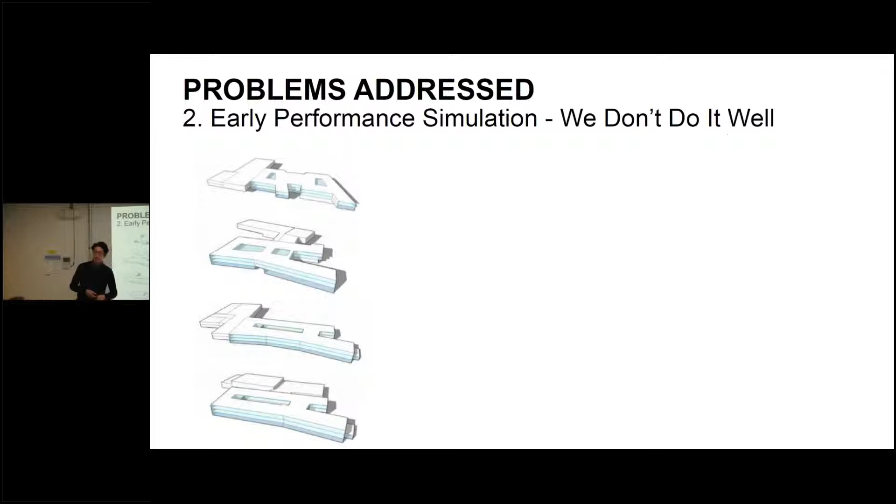So here we go. We have all of our different building masses. And with Sefaira, you can very quickly get an energy use intensity. You can get kind of a split of your primary load breakdown. And what's really nice is sort of this dashboard for what's over or underlit from a daylighting standpoint. So they're running full annual analyses for daylight and giving you sort of a breakdown of what that looks like. But I mean, this is sort of what we're left with, right? 29, 31, 33, 31.

It barely moves, right? And all of our takeaways from this is that they're all cooling dominated, and the daylighting amount sort of shifts around a little bit, but this is all not very actionable, right? This doesn't give us a lot of keen insight into which one of these we should actually choose. The differences aren't big enough, right, for us to really gain any insight into this. The questions were too broad, right? We're just trying to understand what's the energy differences between these, and that's not leading us to anything that is empowering, right?

A lot of times something like this would actually be disempowering to architects, right? Because it's saying that the form and the massing isn't really driving energy according to the way that this is being presented. But the real kind of questions and nuance are much more detailed than that. So the takeaway from this is that our questioning for early performance simulation really needs to be targeted to be effective. And that's going to be a theme that you hear throughout this whole presentation. The other thing would be that showing EUIs like this is almost attempting to be predictive modeling.

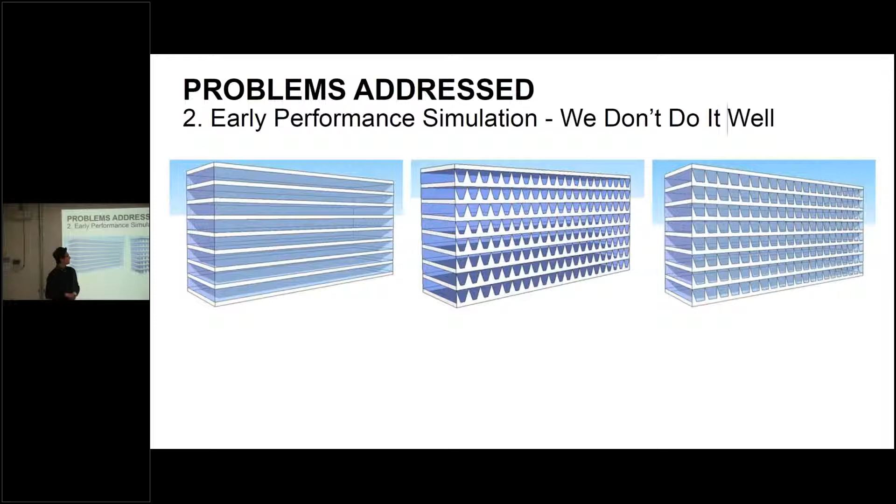And here's another example that kind of always drives me crazy. Another Sefaira example, not picking on them, but they have some good case studies on their website. So in this case, you have an architect looking at multiple different types of facades, sort of a typical approach. In this case, it's window to wall ratio with a different type of detail that kind of projects outward. And what you generally start to see from this are a bunch of bar charts that talk about the trade-off between, cooling energy is blue, solar load is red, daylight is orange, and these are baseline and two different glazing types.

So once again, this isn't really being driven by any particular question around HVAC system selection, target loads, comfort, but it's really just let's see what the energy differences are. And the result is something that, once again, is not significant enough to really drive decision making, and it's generally obvious just by looking at the project. And it takes a lot of training and time to be able to set up these simulations. So this actually is not doing us any favors, right? This level of study and this level of analysis.

So how do we get beyond this is one of the questions, both in terms of setting up early conceptual simulations that drive design, and then also engaging designers and engineers and early stakeholders around how we present that data and form a conversation around it.

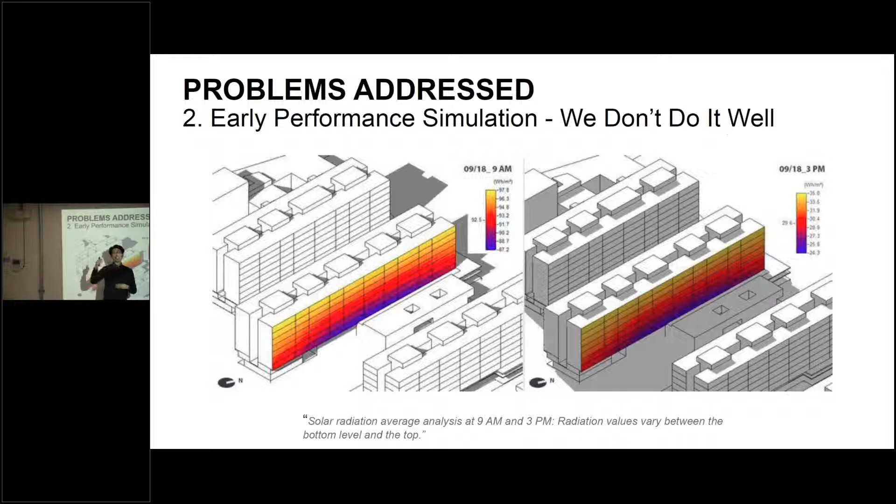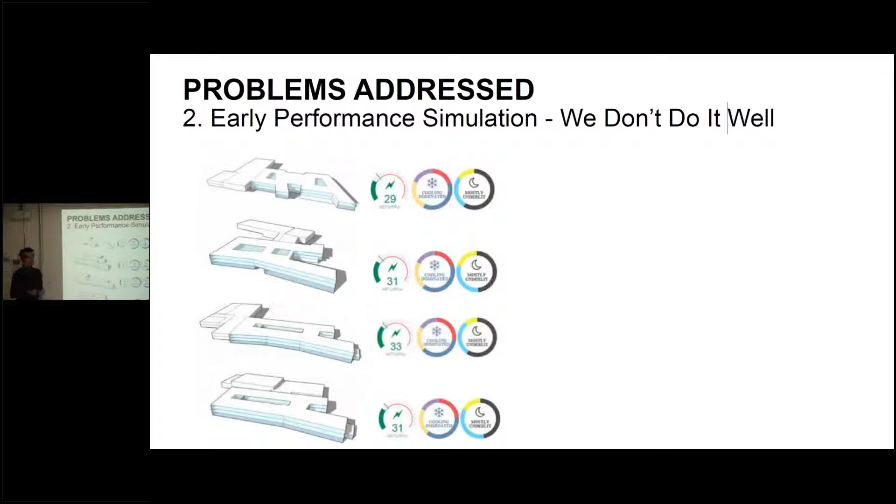So problem number 2, there aren't a lot of good examples out there of how early simulation really leads to a better building in the end, right? There's ultimately a disconnect between even this type of modeling and the compliance model at the end when we do a full-blown rigorous analysis. And what's the relationship between those two? It's not a very direct line in that respect. Okay, so problem number 3 that we're looking to solve is this communication gap between simulators and designers, right?

This is one of my charts, so I get to pick on myself a little bit too. Look at all the bar charts, right? Who is gonna look at this and really start to engage with it when I have 2 seconds with a design principal trying to talk about their facade design, right? This is not doing me any services, although there's some good parts about this.

Fundamentally, it's too dense, it's too complicated. There's nothing about geometry or impact implicit within the graphic. So you show this to someone and their brain just sort of turns off, right? I'm trying to represent a multitude of different variables that are geometrically based in a table of all things, right? It's color coded, yes, but for the most part, this is really hard to track exactly what we're talking about.

We have a threshold identified and some different cases that actually work, but still this is fundamentally just a dressed up bar chart, right? And how do we get beyond this as well? Because we have things like this, we have full-blown energy modeling reports, which also aren't necessarily giving us the insights that we need, especially early in design, right? We shouldn't even really be getting full-blown energy modeling reports for that.

And then also, I just got an example sent to me earlier today. We're looking at Okalux as a product, which is an integrated louver system within an insulated pane. And they can do lots of really good optimization analysis to say that we can block direct sun anytime you need it. So just tell us where you want direct sun and we'll give you an egg crate design that fits in a glass that will block it. And I was like, this is great.

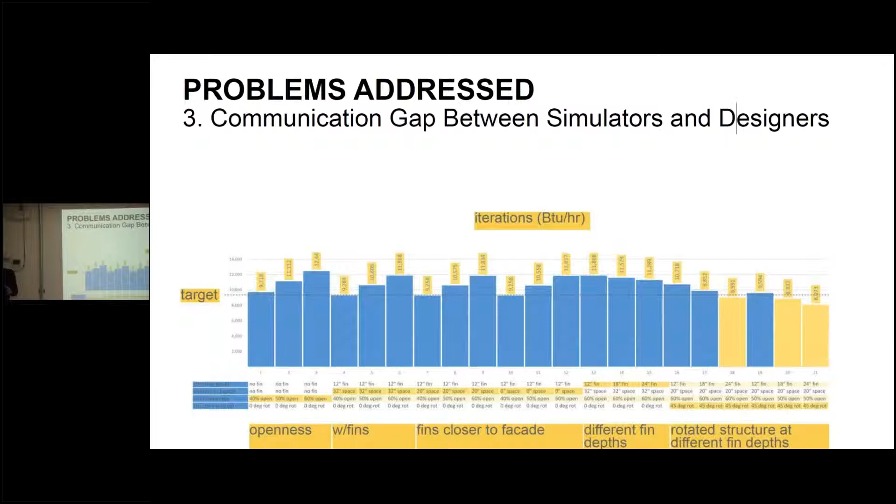So problem number 4 that we're trying to solve with Project StaSIO is the fact that it's hard to learn from each other. BSUG is a great example of a community that we've built in Boise, people coming together and trying to share technical solutions and simulation processes and workflows. That doesn't always exist everywhere, right? And there's a lot of really good resources around how to do simulation.

This is Unmet Hours. This is a fantastic forum where they have all of the different energy simulation programs on there. Experts peruse the forums, and you can ask questions about technical problems that you're experiencing. There's not something that exists like this for how effective was the study? What did you learn from the study? How did this impact design? That's what we need, right? Or that's what we needed.

And Sefaira has a really good case study page. A lot of the software providers do. But like I said, you go through those Sefaira examples, and a lot of those studies you are just left wanting at the end, right? They're not really good examples of how early performance simulation helped drive design and lead to a better product.

And the other thing too is, at ZGF, we're a big enough firm that there are multiple people doing simulation. We have our own internal user groups and a lot of different experts. If you're in a firm of about 30 and you're the only one doing modeling, it can be really hard to share information with folks across firms because those channels aren't always set up. A lot of times people hold their industry secrets and their processes pretty close to their chest. So there's no online community around that.

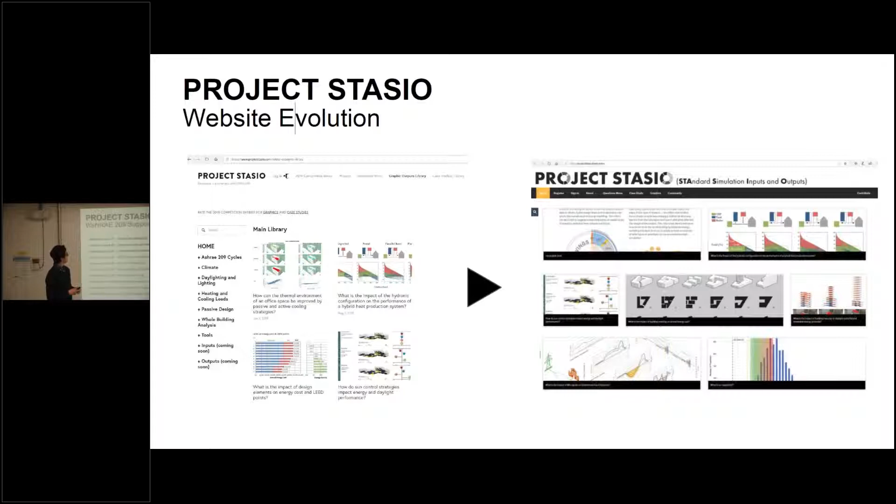So the early thrust of the committee, and actually I guess it was the entire origin story, is that we were tasked with trying to figure out a way to support the ASHRAE 209 standard. Somebody familiar with ASHRAE 209? I know Tim probably is, a couple folks. So this is relatively new, but it's ASHRAE's version of trying to have a standardized process for integrating early energy simulation for design, right? So this is a framework: if you want to do early simulation modeling, follow these steps, and it's a good process.

So they talk about energy benchmarking, climate analysis, and then there's all these modeling cycles, and you have to do a certain amount of these at a certain time in the project to comply with the particular standard, depending upon what you learned in your early investigative studies. So for us, we were focusing on the top three: simple box modeling, conceptual design modeling, load reduction modeling, and trying to say, okay, well, there's this standard.

They talk about doing this, but there's not a lot of good examples out there for what is simple box modeling and what types of questions can that answer, and give us some examples. So if we're trying to evaluate whether we're going to use this standard, we want to know what it can do, right?

We want to have some basic understanding of the process and what problems it can solve. So, we needed to make sure in whatever we did that we were providing resources around that and examples for ASHRAE 209. And then, we are slowly trying to fill in all of these other different cycles and figure out examples and case studies around those as well.

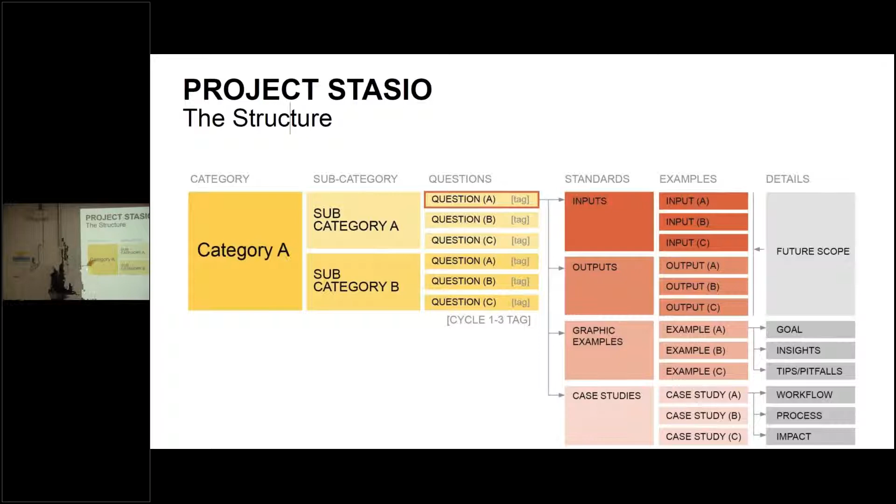What we're doing first is, based upon that question, we're really interested in trying to gather graphic examples and case studies, so that once we get an example, we can talk about what the goals were, insights, and tips and pitfalls for doing that kind of simulation. And part of that was starting now to categorize and catalog what were the key inputs and outputs for that. So our goal was to take all of the things you can do with simulation, populate it, and then start to aggregate examples around that.

And based upon that structure, there's 2 fundamental parts of the website. The first part is this questions menu, which actually took this from a Better Bricks document that came out, I think, in 2012 when I was here at the lab. And it was great because it was their own guide for integrating early simulation into the design process, and they had it by phase, and they had bullet questions at the end, which were: think about these questions when you're doing design during this phase.

And I was like, how great is that to have a menu of questions per phase that you can start to take to your project manager and say, hey, I think we should do this. So connecting it back to my time at the lab, right? We created that on steroids for this particular project. We went through everything from those daylight categories to whole building analyses and tried to list out all the things that we had studied as a group, as, hey, this is something that you can look at, right?

So, how much more energy will my building use if occupant density or use schedules vary from initial assumptions, right? Very key question when you're talking about net zero design or load matching with PV. All the way to, what are my energy end uses ranked from highest to lowest, which is a great question that you can answer with whole building simulation. So these link to the examples and case studies, right? You can click on this and it will take you to all of the graphic examples of someone trying to answer that question so you can learn from it.

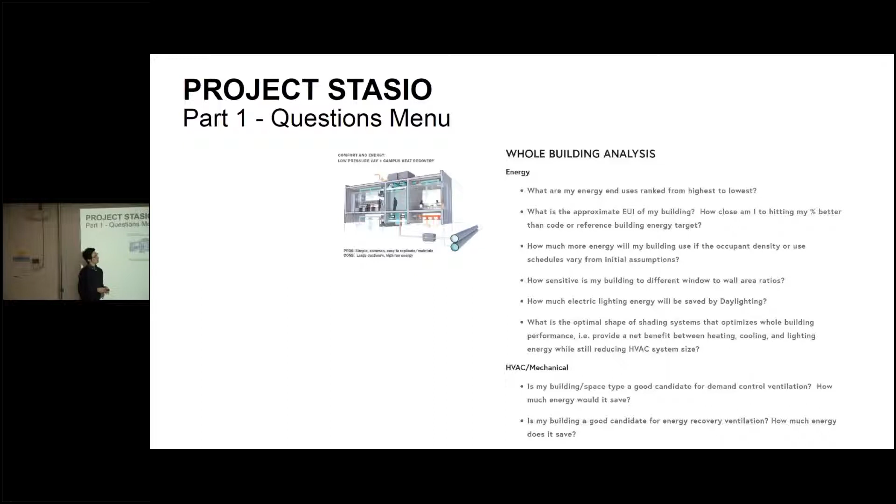So the second part of the website is the graphics library. There's also a case studies library. And this is where we sort of house all of the submissions that we've gotten from the internet, from our engagement with the IBPSA users, AIA, all of our kind of promotion, like with what I'm doing here. And the key thing here is that these are available, and then we have some type of filtering mechanism, like an Amazon shopping list, where you can say, I'm doing ASHRAE 209, I really need to understand load modeling, so I can click this and this will automatically shuffle and show you all of the ASHRAE 209 cycle 3 load reduction modeling examples, so you can learn, get inspired, and start to understand that.

So we have it broken down by cycle, by the different categories, also by tools. So if you're using Honeybee for energy analysis or want to know what people have done that for, you can filter for that and then it'll reshuffle. Inputs and outputs. So let's say you want to look at annual sunlight exposure as a metric. What are the different ways that you can deal with that? You'll be able to filter for that and everything will come up that have tagged ASE as one of the outputs for their submissions. So that's sort of the guts of how we intended the website to work.

We're able to get pretty far there with sort of the Squarespace site, but the functionality is much better on the new site in terms of its navigation and like the checkboxes you can click on and off to kind of look at different filters.

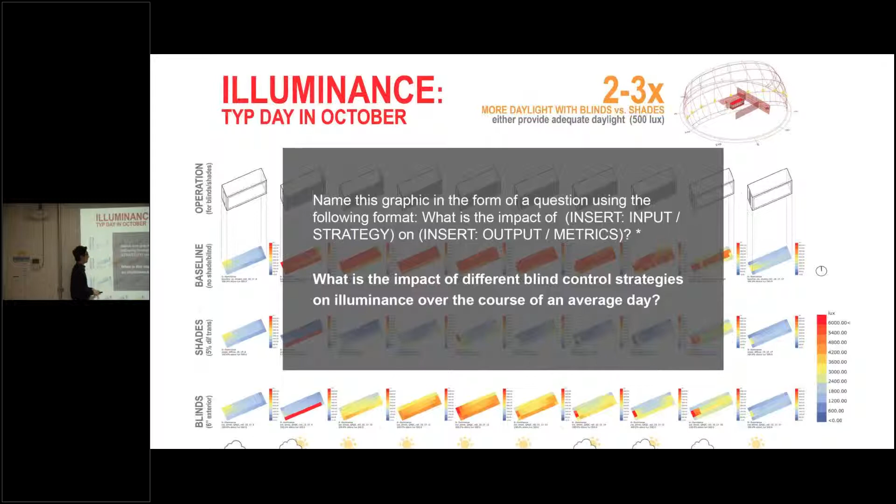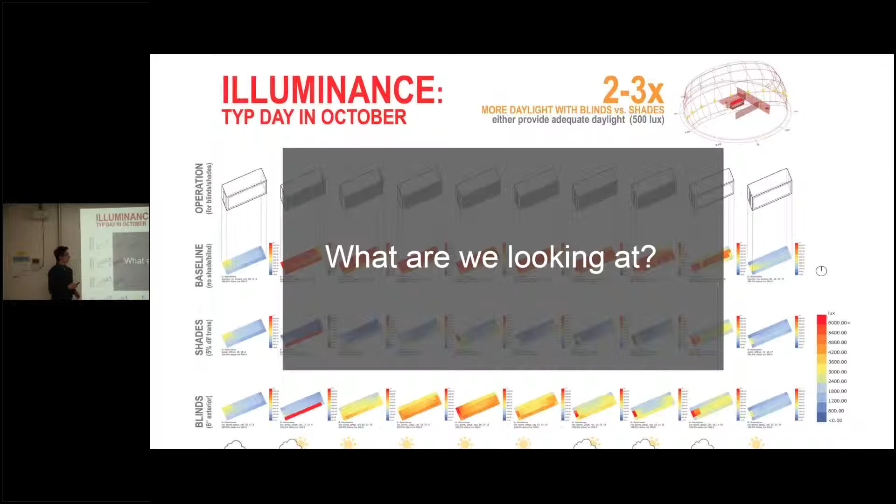So the next question is, what are we looking at? I think they're like 250 word maximums in each one of the different sections. I'm just going to summarize those for this graphic. But in this case, since this is a fairly complicated graphic, that allows us to say, well, this is looking at two different blind control strategies. One are Mecho shades, and the other are blind slats, both automated. They're compared to a baseline condition without any solar control. And it's shown for a typical day in October.

So there's a key for what the sky condition is on the bottom. Everything's in lux, so it's illuminance, single point in time, hourly illuminance. There's a key up on top that shows when the blinds are being triggered based upon those different sky conditions. And then we show in the corner some of the key takeaways with the actual geometry of the space and its particular context. So just the bare basics of what exactly we are looking at.

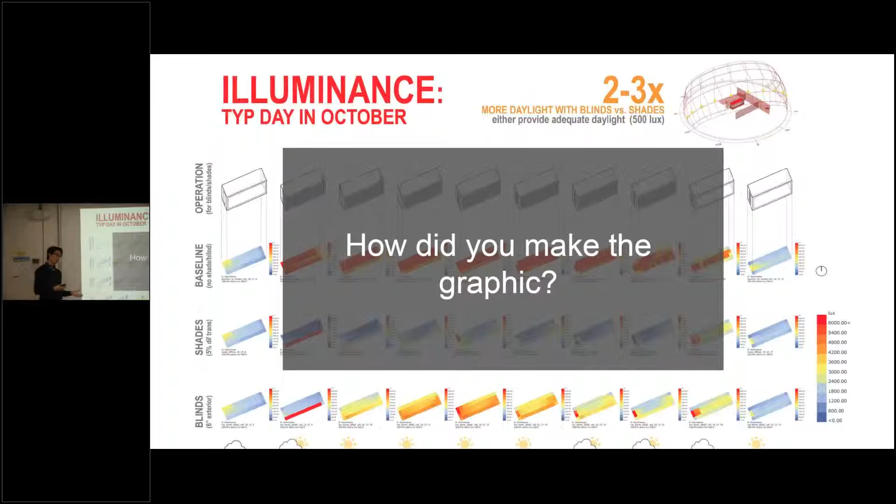So the next question is, how did you make the graphic? And I think that's a really key question too, because there are so many different ways and workflows to do it that it's really interesting to see what people are submitting and figure out how much of it was post-processed, how much was done within the program, and so on. And the key thing about this graphic is, thinking back to the old days, you can imagine doing this in Ecotect and Radiance and having 30 different image thumbnails that you put into an InDesign file. Just makes your head explode a little bit.

But since the analysis in this case was done in Grasshopper, a lot of the graphic manipulation can also be done in Grasshopper, which is a plugin for Rhino. It's a parametric visual programming interface. And what's nice is that since we're running each one of these for a certain amount of hours throughout the day, all these files get automatically stored into a folder, and then the graphic component of the tool allows you to harvest the image files out of that folder and translate them according to a script so these all get automatically placed in Rhino. And then you just render that screenshot and plug it into InDesign.

So all of this is one image that gets automated and comes out of Rhino. It allowed us to do so many different iterations so much quicker because of the graphic workflow of how to produce a complicated matrix of time series data. So that was one way, and then everything else is post-processed. All of these labels are in InDesign. These labels come directly out of the program, so those were automated, but there's always some level of post-processing that goes on.

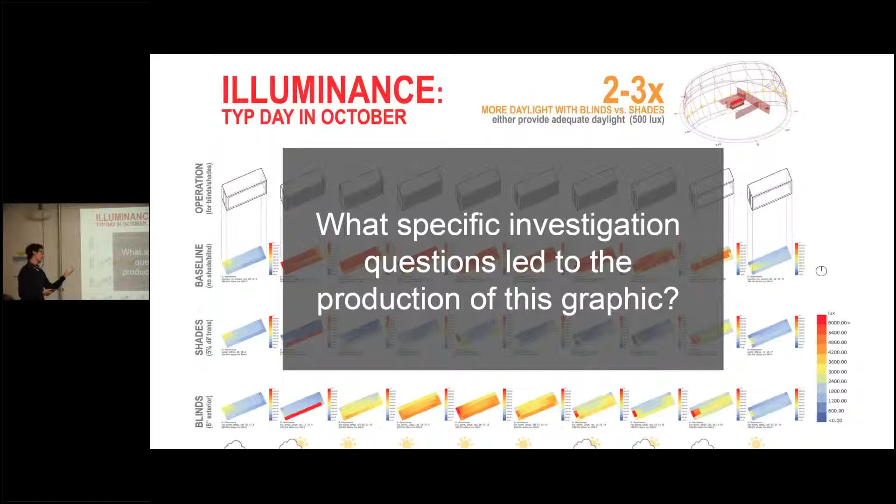So then the next question is, what specific investigation questions led to the production of this graphic? Going back to the title, we're really interested in the difference between these two different blind conditions. That was primarily driving the entire thrust of the study. There were some implicit workflow questions like, how do we simulate this properly between MechoShades and blinds, which have to be angle optimized. So we did that all within the script as well. So there were some more complicated simulation questions that we were investigating as well.

But fundamentally, blinds versus shades, and specifically how much of a difference, because we know that blinds are going to be better because they redirect light, but we want to know how much, because we also know that blinds are going to be more expensive. So we had to advocate to the client the value of them through these types of studies and the quantification of that particular difference. I didn't mention it before, but this is a makerspace, part of a lab building on a campus in California. So sort of a small jewel box that they wanted to be a feature of the campus.

They wanted it to be all glass, but we also know that for a makerspace, the comfort requirements and the visual acuity requirements are high, so those were automatically in conflict, which is why we looked at automated shading. And that's getting to this question: how did this graphic fit into the larger design investigation, and what did you learn from producing this graphic?

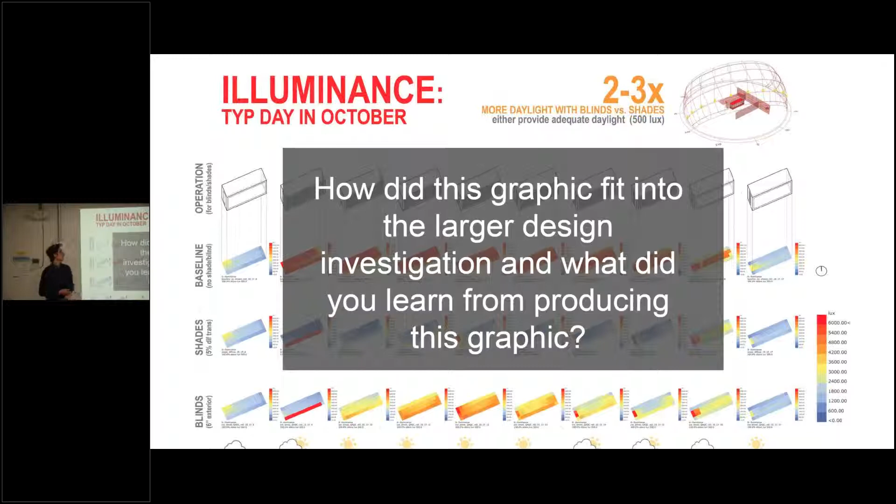So, because we had this fundamental conflict between wanting a glass box and needing acute visual control, we knew the sun's going to be on this facade so often, the blinds are going to be drawn a lot, right? That's what this is starting to tell us. So we want to make sure that when the blinds are drawn in that condition, it doesn't kill the quality of the space. Because if it's a MechoShade, it's just a reduction of daylight coming in, versus if it's blinds, it's redirecting that and actually having a better impact on the space.

So the high level takeaway is that depending upon what hour you're looking at, between the baseline condition, MechoShades, and the blinds, you can just tell from a color standpoint that there's a big difference here. You could tell that it's roughly 2 to 3 times more daylight in the space with these automated blinds on average. So that was the highest level takeaway that we wanted to look at.

But that also goes to the next question: what is successful about this graphic in the way that it communicates information? And what we wrote in the form is that there's a high level takeaway. You don't have to get into all this detail, right? You could just look here and that's your highest level takeaway. But the further you look into this, the more detail you can extract out of it, including spatial data.

So this is a little misleading. There's a section down below that doesn't have any blind control. The blinds stop, I think, 11 feet above the ground, and there's an overhang. The simulations all take this into account, but I didn't get it into the key graphic. But what's interesting is that you can see, even with the blind condition, you get a little bit of a hot spot still in the evening, right? So even with these automated blinds with the better daylight, you still have a hot spot from a glare perspective that needs to impact programming.

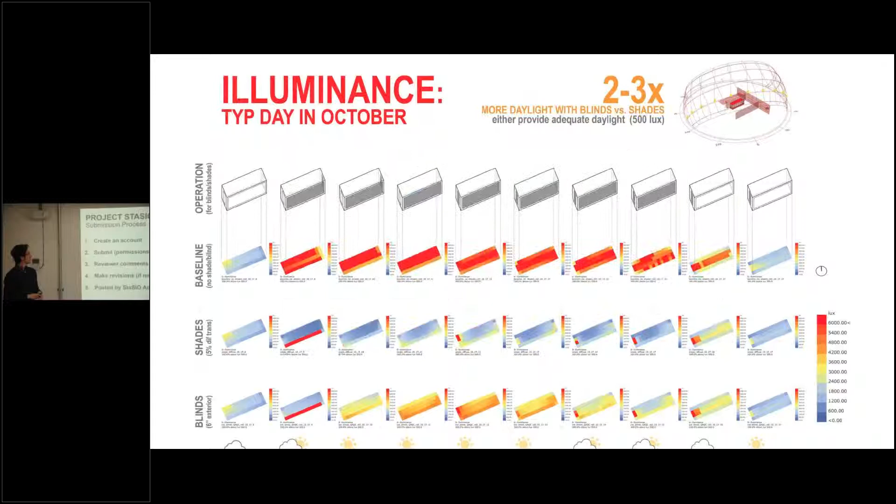So that was five fairly simple questions, and the level of detail of the answer can vary, and you'll see that across the website. But that's an example of the level of information we're asking, really trying to tie it back to the investigation process and the design process. Okay, so as I mentioned, the submission process is fairly straightforward with the new website. You've got to create an account, and you submit.

We really spent a lot of time making the online review process a lot easier. With kind of iteration 1, we had like a Google spreadsheet that we would email you, and you'd have to modify it, and then you would email it back, and then we would go back and forth that way. It was just ridiculous, right?

So now everything is more like a journal paper kind of format, to where everything is handled within the website, and you can log in and see my comments on your submission, saying like, oh, I think this legend needs to be a little bit bigger. Oh, I think this could be a little bit clearer. Hey, I modified this typo, is that okay?

And so the back and forth is a lot more seamless now, which we're really excited about, especially because we get 50, 100 submissions for our next competition. It needs to be streamlined. So after we do that, then we post it and it shows up on the website.

What was really interesting is that in 2018, our competition recap, we started this, we got about 20 different submissions just from us engaging folks. Then we were like, hey, we should probably do a competition and really use that as a catalyst for getting these particular submissions. So we launched a competition. Winners were announced at the SimBuild conference in Chicago last year in the fall. Launched the competition in the summer, results are in the fall.

And it was great because we got 40 different graphics. We got 12 different case studies. Recognize this one came from the lab. And we set up this whole competition structure, which I think has been really great for the website to actually get those submissions. And we set them up sort of like the AIA system, where we couldn't really rank them because we're getting very different types of graphics and simulations. So we really looked at honor awards and honorable mentions, right?

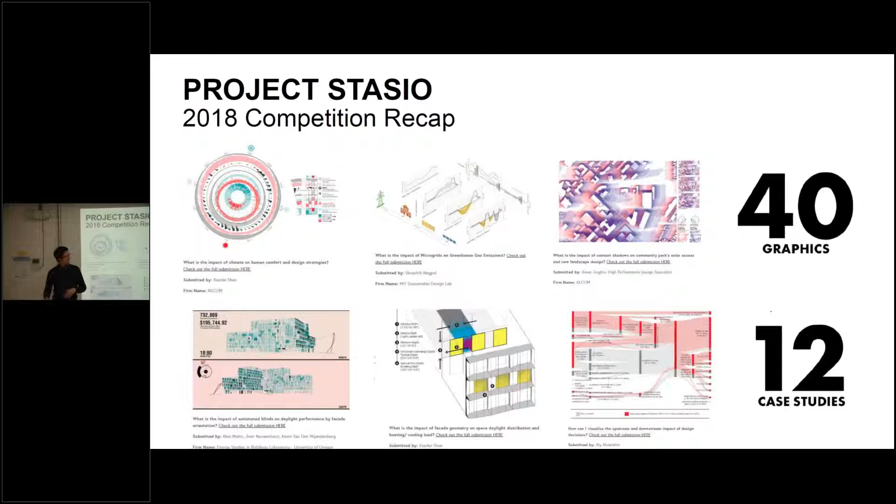So these are the 3 graphics that got honor awards, and I'll talk a little bit about those next. These are the 2 case studies that got honor awards, and this actually won the People's Choice Award. Sankey diagrams, who doesn't love Sankey diagrams, right? So it was great because it did its job. It was so successful that we're doing it again. We've launched our 2nd competition. All this material just went out earlier this week.

So our submission deadline, if folks are interested, is 7/15, and then similarly, winners will be announced at the next SimBuild. If you get an honor award, I believe you get invited out to present during one of those sessions. We did it last year, it was a lot of fun. We've got a page for details of what that framework for judging is. So if you do submit, there'll be a checkbox at the very beginning that says, do you want this to be part of the competition? Yes, no, maybe. And then you'll move forward in doing the actual form filling.

So, okay, that was a lot of the details. I do want to talk about what we learned from some of the particular submissions from 2018. Let me just do a quick time check.

So this was one of the graphics honorable mentions, and what was really great about this is it's a pretty simple analysis to do, right? This is a butterfly shadow diagram. This is for September 21st, and they took every shadow at every hour, overlaid them on top of each other, and you get this heat map of where light is and where dark is from a direct sun standpoint. So they took this to the next level in Grasshopper, and you can read about how they did that on the website, and did a 2-tone color where the AM shadows are red and the PM shadows are purple, blue on the screen.

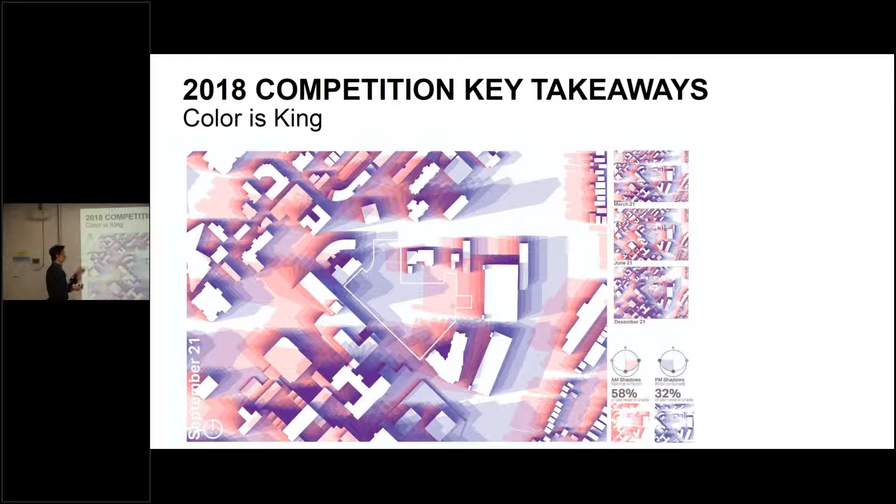And that was really great because they're designing for this community park. You can see the footprint. And because of the programming, the park had a very specific occupation during the morning and a very specific occupation in the afternoon. So they really wanted to understand the difference in shadow patterns between those 2 time frames. So this allows you to do that at a glance. It also provided key insights into plant programming for the landscape in terms of having a low, medium, high exposure to sun.

So based upon this condition and also these other solstice and equinox conditions, they could actually give that information to the landscape designer to help their plant palette selection. So, pretty simple, but there were a lot of insights that came out of that.

One of my tips always with graphics is that there needs to be a spatial component, right? So you understand the impact of geometry on performance, whatever that is, and then a quantified component so you have a benchmark to study if you're doing variations and iterations. So they just roll up in terms of percentage of the site that never gets shade in the AM versus the PM as another metric to evaluate things by.

So this one was great. And I remember reading in their submissions that when they were asked what was the most successful thing about the graphic, they said that people actually wanted to talk about it. So they attribute that to it being visually interesting. When they took this to their charrettes with the clients and other stakeholders, they said it generated a lot of discussion, which is a fantastic outcome, all because of how visually interesting it is.

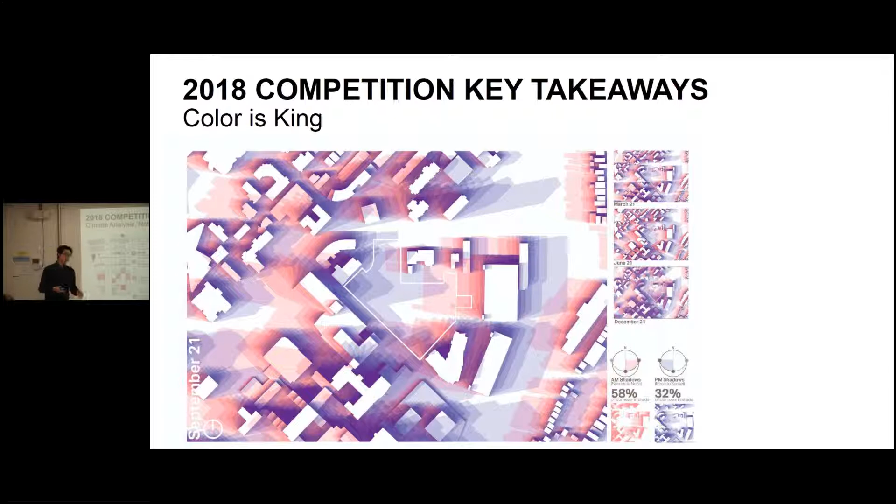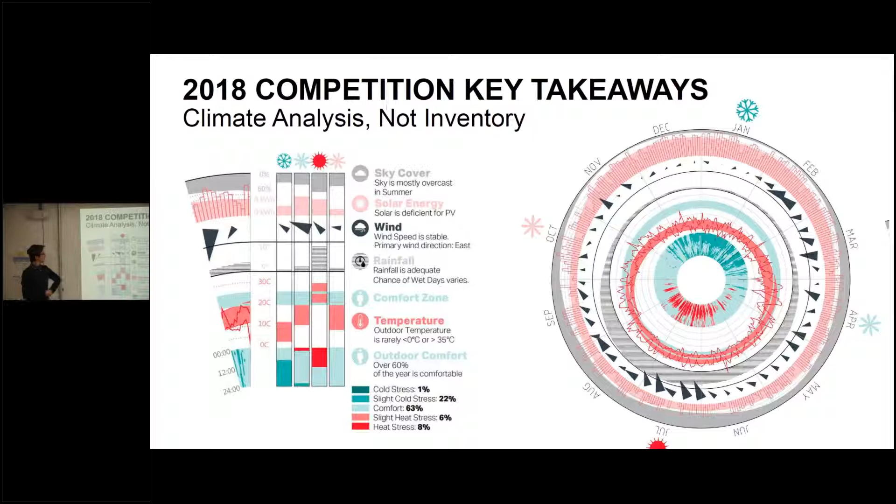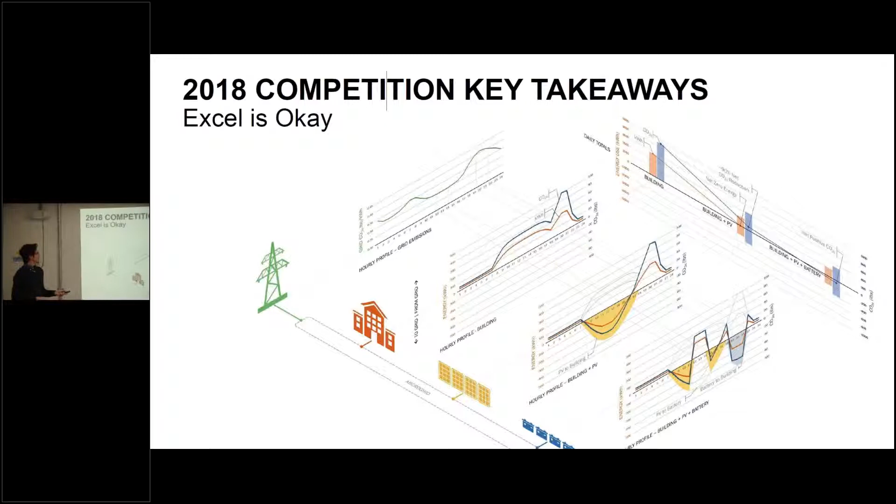Okay, so I think we're doing pretty good on time.

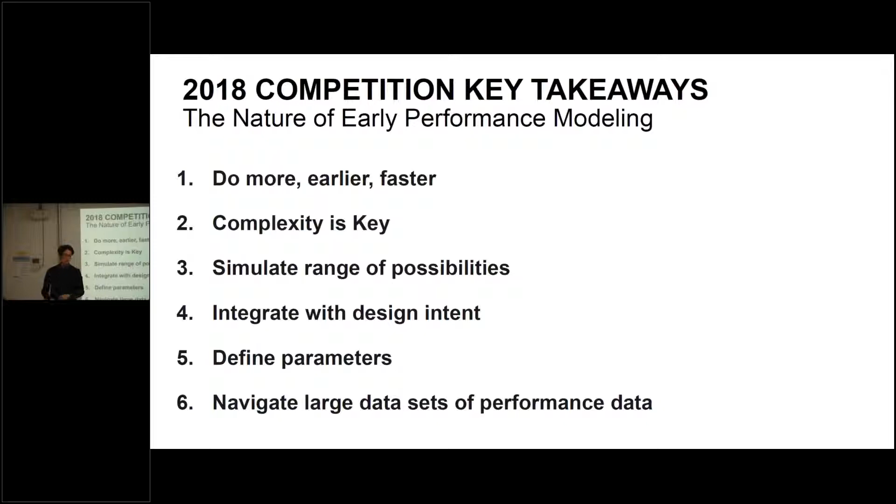So when we're doing that, the key becomes now we must navigate these large data sets in ways that are insightful. So I've got an example of that, an interactive way to do that, and a static way to do that, and hopefully I'll be able to get through that here in our last couple minutes.

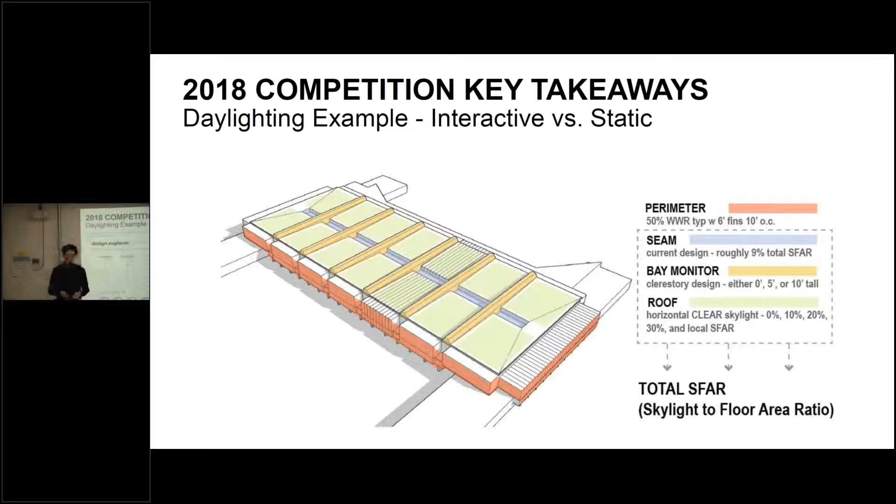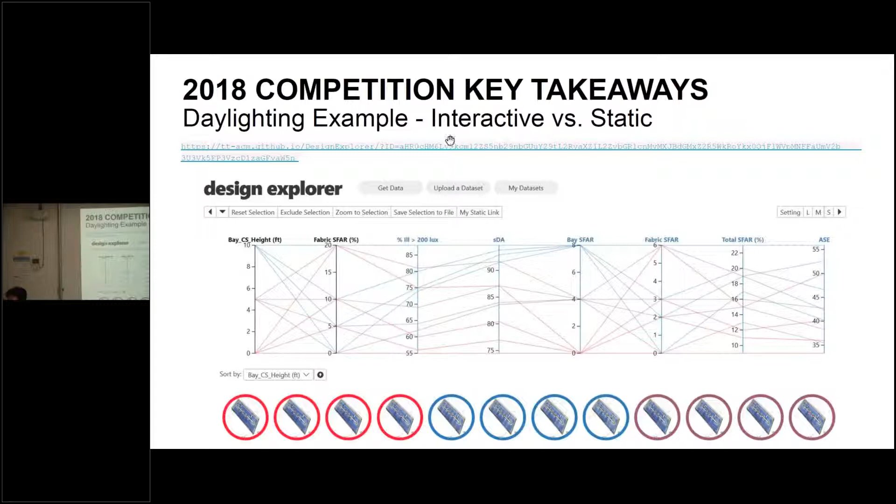So there's a new tool out there called Design Explorer, which is free, online, and it's basically a CSV viewer that uses images and three-dimensional files to give you additional information. So I would recommend checking this out if you have time, but I'll give you a quick preview of how it works.

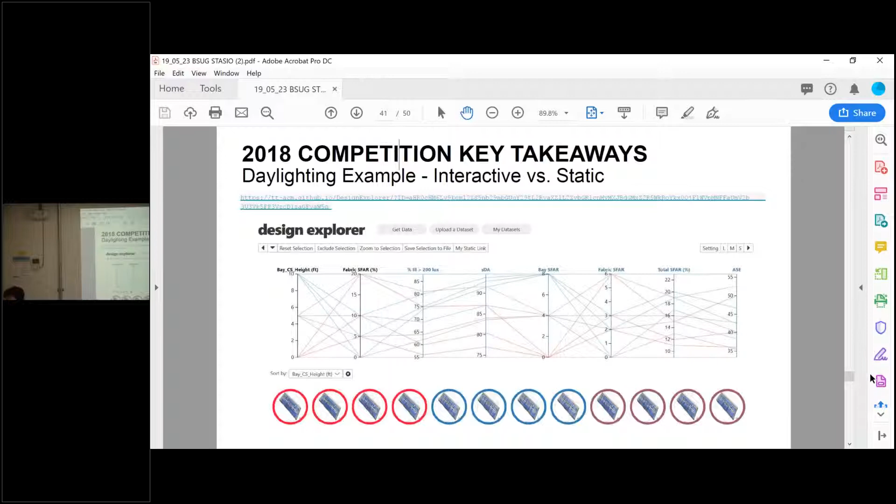So, all right, stand by. Okay, so parallel coordinate plot. Has anybody seen one of these before? Tim, I know you have a couple of folks.

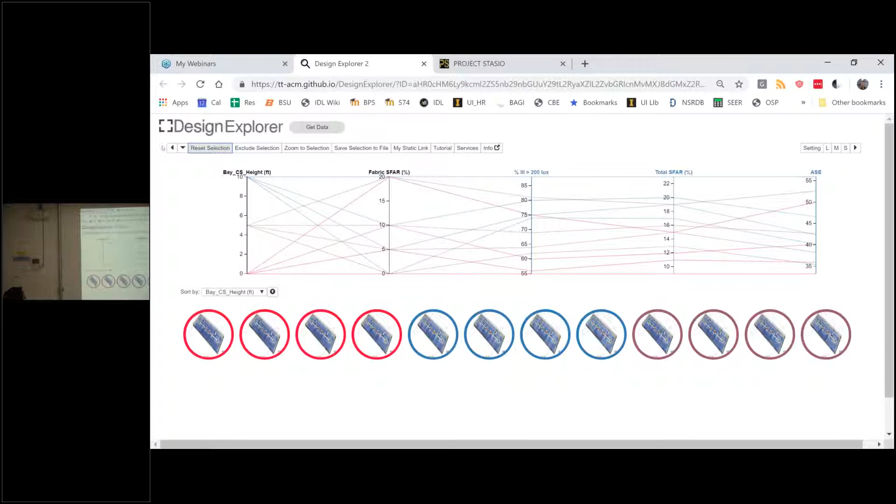Basically, this is just a way to show that given a certain set of inputs, these black guys, you get a certain set of outputs, these blue guys up here. So each line is its own simulation. So, this is the bay height. So given this particular bay height and this particular skylight to floor area ratio, you get a certain percentage of the floor area that's daylit, a certain skylight to floor area ratio, and a certain annual sun exposure. Let me turn that one off, actually. There we go. So, we're tracking daylight performance and area or cost, essentially.

So what's nice about this is if my goal is 75 for this particular metric, I can say, okay, let's just filter out all the cases which don't meet that particular goal. So now we're down to 8, 9 different versions. So that's one way this is great, because you can filter for your different performance outcomes.

But let's start over here, because if I say that we don't have any skylights except for that seam and the perimeter, then it says, sorry, the lag here, there we go. Number's a little bit small, but this is saying that it's at 55% daylit. We're trying to get to 75. So I can say that right away we need something in terms of skylights and clerestories or these monitors.

So if I go up to a 5-foot tall monitor, then it gives me an increase in performance from 55 to 62. So good, but we're not at our 75% goal yet. So I can keep going up, and I can go to a 10-foot tall clerestory. And it shows that now we're getting about 74. So if we were just doing clerestory, this is a parameter I would write down and give the design team: 10 feet is about the right height that you should be thinking about.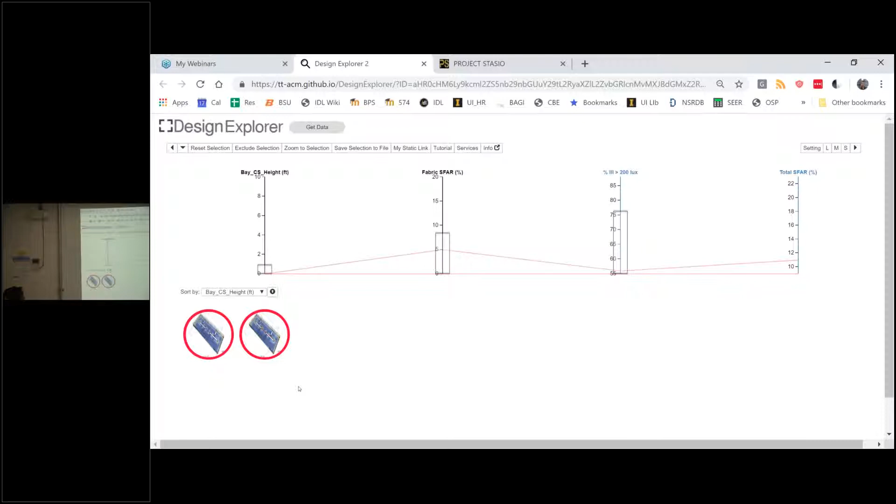And I can do the same thing for the skylight to floor area ratio. So I can say, okay, if you have 5% skylight to floor area in those patches that we were showing, then essentially, you go from 55 to 56. So they're not doing anything. So that's a key takeaway right there. 5% is not big enough.

We go up to 10%, then it's 60%. So doing better, but we're still not at our 75. So you can keep going up and up. And we're finding that a 20% skylight to floor area ratio gets you 75, essentially. So a 20% skylight to floor area ratio or a 10-foot tall monitor will both meet your goals. Those are two good key takeaways.

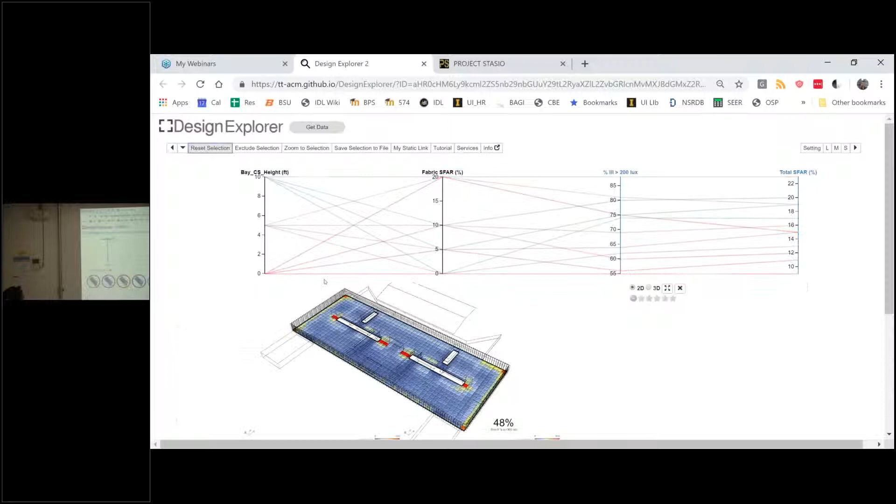But what if you wanted to combine them? You can reset this, and then you can start to, okay, so let's say if I do a 5-foot tall clerestory and a 10% skylight to floor area ratio, it gives us 69%. So not quite 75, but pretty close, within striking distance. So we actually recommended this as a potential option if you wanted to combine them.

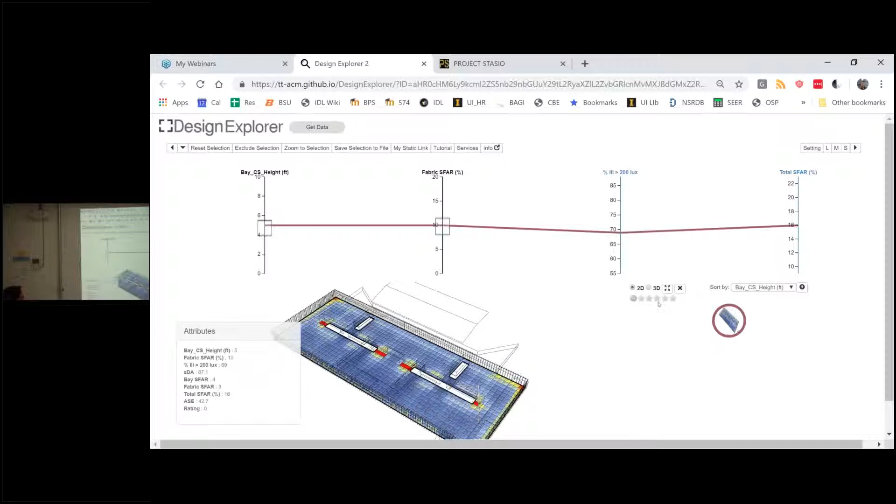And what's nice about this, though, is that not only can you navigate the data, you can start to also look here and understand the kind of spatial distribution. So we have a lot of goals around the rhythm of light in the space as you move through it. There's also this 3D viewer that gives you a sense of what those look like, so the geometry changes around in case you need a visual representation. And that's a really great way to communicate some of that information as well. And you can also include some of the grid data into this as well.

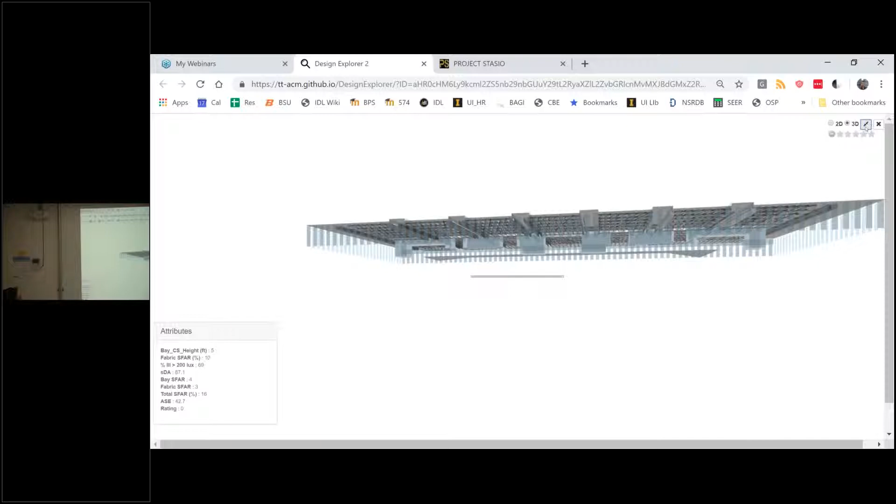So this is a really comprehensive tool that allows you the ability to interact with these data sets. And this is only a single variable. When you do multiple variables and you want to look at highest daylight, but lowest cost and lowest peak solar load, you can start to do that and start to understand what ranges of parameters or geometries can get you there. So this is a really good way to do that.

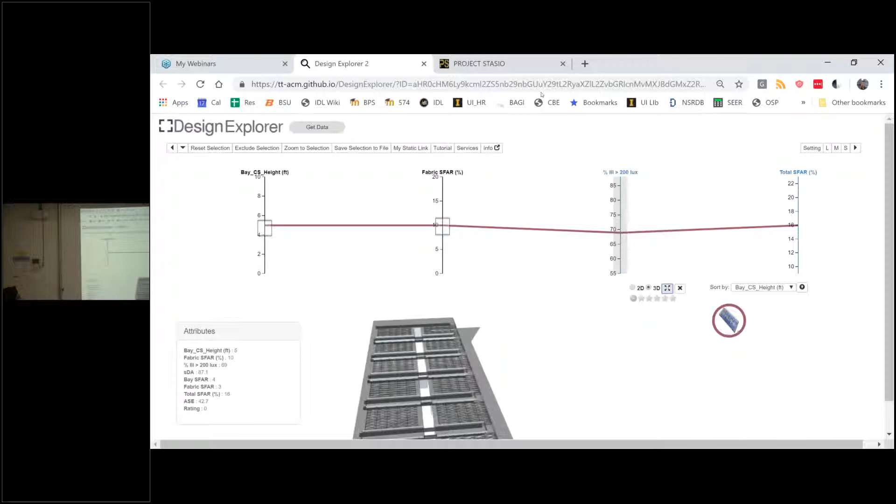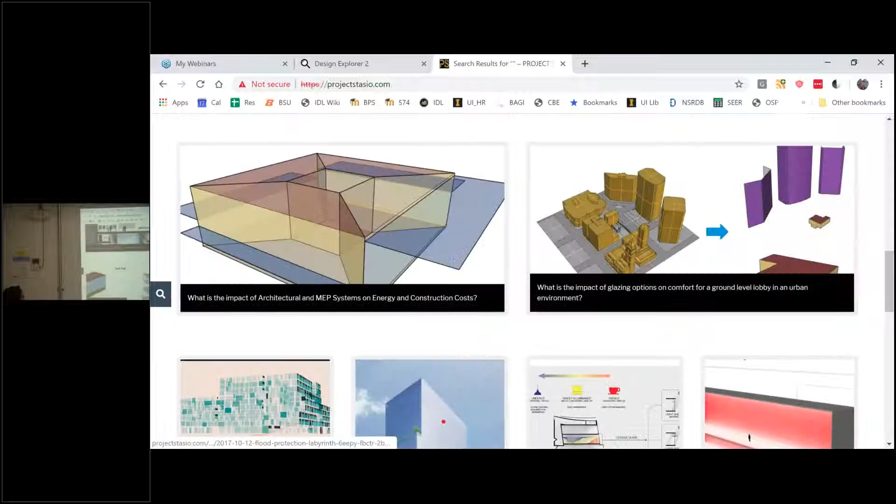So I just wanted to leave you, I know we're right at the end, so I'll wrap this up, that takes interaction, though, to do. So there's still a need to solidify that into a singular graphic to communicate all of that information. So a lot of what we saw, and this is the new website, take some cleaning up, filter for case studies, is that teams are thinking about ways to actually communicate that singularly. So this is an example here, an honor award as well, where this team is thinking about, well, how do I talk about, this is very similar to that first Sefaira example. I've got all these parameters that I'm changing: window width, window location, height, overhangs, fins.

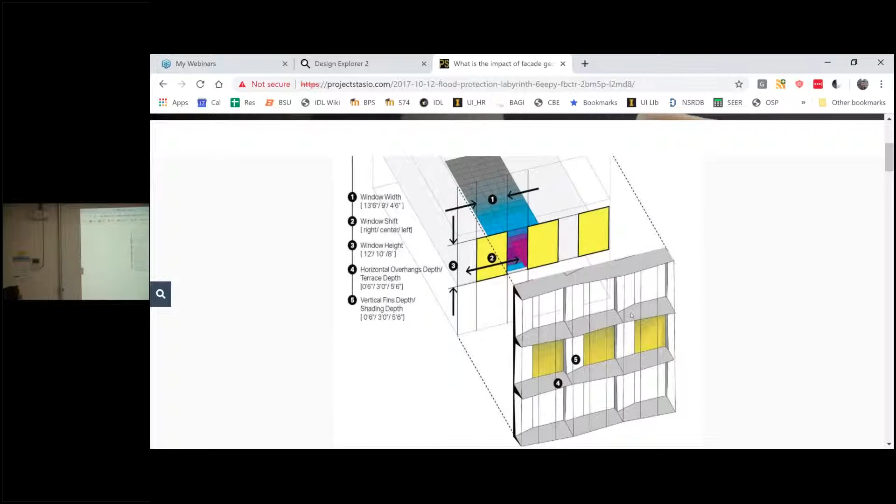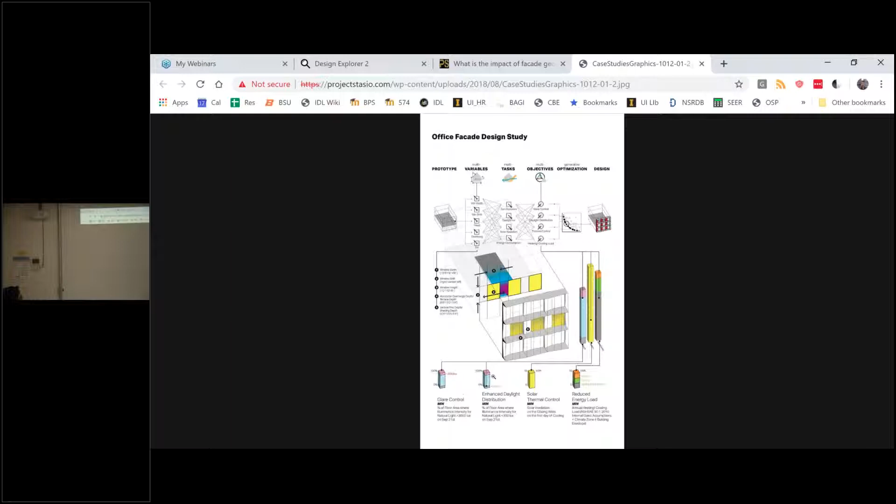Scroll down. Oh, this is squished. We've got to work out some of these graphics. Then they're looking at, okay, well, here's all those variables. Here's the outputs that we're looking at. Here's our framework for analysis. And then they get into, well, how do I actually show that in a singular bit? They're highlighting two different streams. So these are two different examples, and they key them to this matrix. So they're giving you that visual connection. They're telling you what their inputs are, what their outputs are, and they're doing a comparative analysis between two with that same type of parallel coordinate plot.

There's a million different ways to do this, and we've got about 5 different examples on the website that you can look at and start to understand what are the strengths and weaknesses around using this type of format for these large data sets. So I would encourage you to check out the website. You can read all about what in the hell they were doing with this case study in terms of the design analysis, how they did the graphic, how they set it up, and the ultimate insights they gained for the designer. So that's what the website's about.